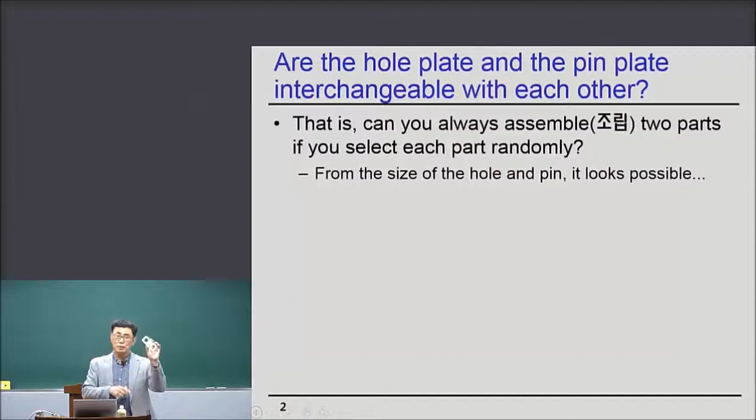Now, from the size of the hole and pin, I think you know that the hole size is from 30.0 to 31.0. 30 to 31. It's a little large compared to the basic dimension of 30. And what about the pin? The pin is smaller, right? 29.0 to 30. So the pin is smaller than 30, and the hole is larger than the basic dimension of 30. So you will think that since the pin is smaller than the hole, it can be assembled. Is it true?

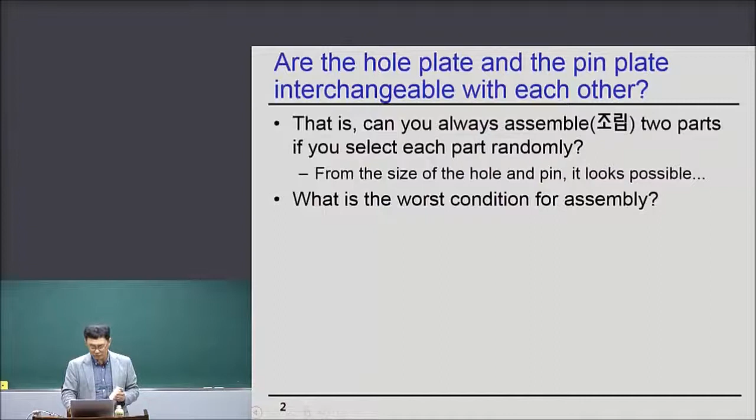Whenever you think about whether two parts can be assembled, you have to think about the worst condition for assembly. The worst condition for assembly is the maximum material condition, MMC. So if the pin should be maximum material, the pin should be large within the permitted range. What is the largest size of the pin from the permitted range? 30.0, right? Since it is 29 to 30, 30 is the maximum material condition. So if the size of the pin is 30, we call this the MMC pin plate. Now, what about the MMC hole plate?

Since this plate should be maximum material, the hole diameter should be smaller so that it has maximum material. So what is the smallest size of the hole from the permitted range? Since the hole is from 30 to 31, 30 is the MMC hole plate. So the MMC pin plate and MMC hole plate diameters are 30 and 30, right? Even if you select randomly, by chance, in a very extreme, rare case, the MMC pin plate and MMC hole plate are selected. This is the worst condition for assembly. Can they be assembled?

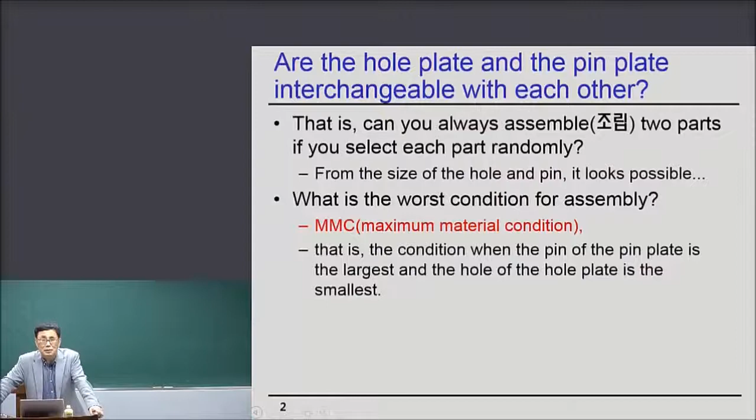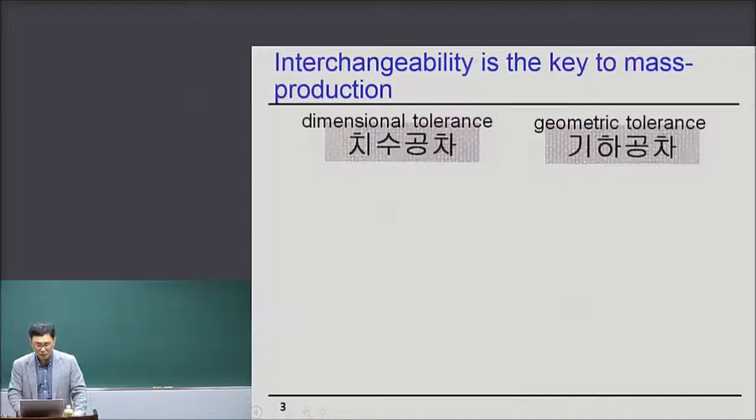And so interchangeability is the key to mass production. And tolerance, there is a dimensional tolerance and also geometric tolerance. The geometric tolerance, I will teach it next lecture. So both dimensional tolerance and geometric tolerance enable interchangeability for parts, so that mass production is possible.

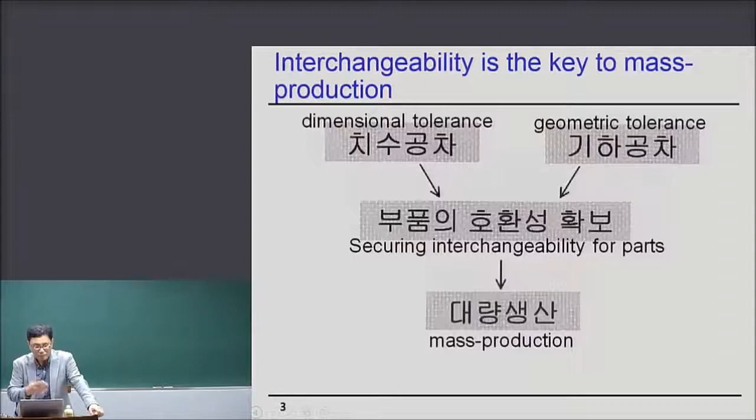So the contribution of Mr. Ford, Mr. Ford is an engineer, and his contribution to mass production is to set up the tolerance system. Okay, maybe some students think that the contribution of Ford is to generate a conveyor system. So, okay, even if there is a conveyor system installed, if the interchangeability is not secured, then mass production is impossible.

Assuming that assembly technicians try to put the tire onto the shaft, and then he found that the tire hole is smaller, so now he tried to enlarge the holes and then assemble the tire onto the shaft. Then it would take 30 minutes, even if he's a very nice, skillful technician. 30 minutes is assumed. Then how can the automobile be produced every 1 minute? Okay, so the contribution of Mr. Ford is that he set up a tolerance system so that interchangeability is possible in his shop floor. Okay, all right.

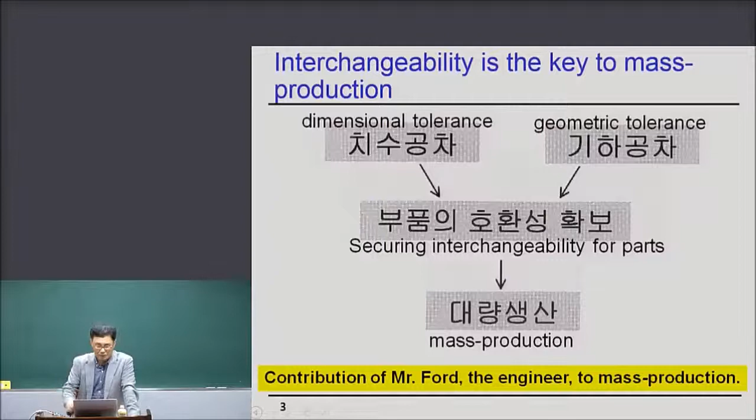So I'm going to talk about another interchangeability example, which is the assembly of a stamp and its cover. Maybe if you are foreign students, not students of Korea or Japan, maybe China, maybe in the United States, I don't think they are using any stamp instead of a signature. But anyway, in Asian countries, we are using many stamps, our own stamp. Our name is engraved in the end of the stamp, and we put it on the paper.

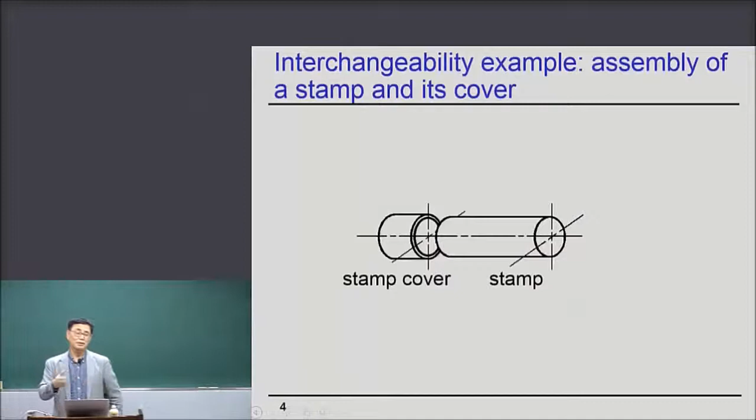And if it's an expensive stamp, it has a stamp cover like this. So the stamp cover is protecting my name at the end of the stamp. Okay. So every time I use the stamp, I put the stamp cover on the stamp. All right. Anyway, imagine that this is another example of assembly of two parts.

Now, we assume that stamp covers are manufactured by Seoul company, and its inner diameter is 10 millimeter. In my drawing, I just draw the shape of the stamp cover, and then place the dimension of 10 millimeter, just only 10 millimeter, so then the general tolerance will be applied. And the stamp by Suwon company. So the Suwon company will make many stamps based on my drawing. But on my drawing, the stamp diameter is designated only by 10, without any tight tolerance. So just 10. So general tolerance will be applied.

Now, my question is, with the stamp from Suwon company and stamp cover from Seoul company, I'm going to select one of them randomly and try to assemble it. Then my question is, will it be assembled? Okay? Will it be assembled? Now, what are you going to think about? MMC stamp and MMC stamp cover. So MMC stamp means the maximum material.

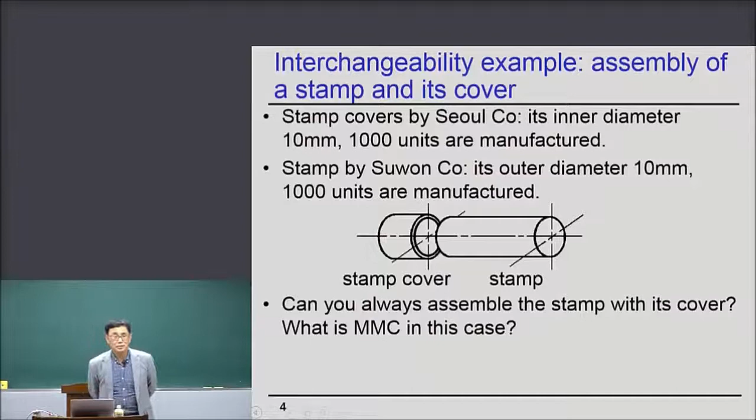So interchangeability is gone, right? Based on that general tolerance, interchangeability is impossible. And another question is: even if you can always assemble them, are the clearances proper?

Maybe the stamp is 10 plus minus 0.2, so let's assume the diameter of a stamp is 9.8, a smaller stamp, and the stamp cover is 10.2. The hole is large. So then it can be assembled, right? But the clearance is 0.4 millimeter.

If I join the stamp and stamp cover and hold the stamp in vertical direction, then the stamp cover will drop off right away because of the 0.4 millimeter clearance. The function of the stamp cover is to protect the stamp as it is always inserted. But if it easily drops off, then the function of the stamp cover cannot be realized.

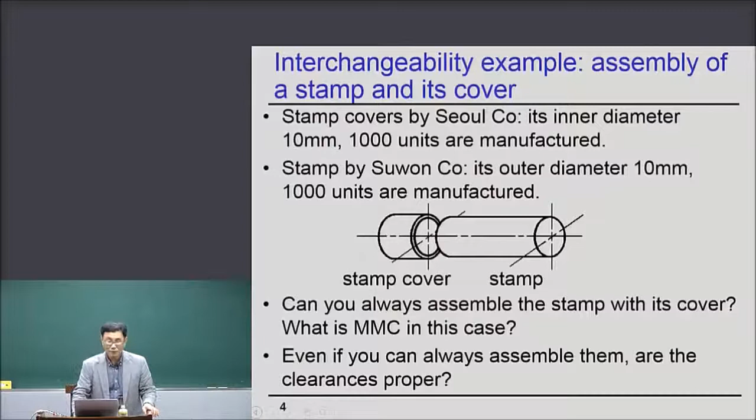So also in this case, we call it interchangeability impossible because the required function cannot be realized. All right? So anyway, with the general tolerance, interchangeability is absolutely impossible. Okay?

Now, if you send out the drawing with the general tolerance, then your stamp covers will be distributed like this. And this is my schematic. I convert this graph into this type of diagram. Where you see the large M, the stamp cover size is 10.0 millimeter. Of course, there are so many 10.0 diameter stamp covers, so I call it large M.

And large B is big size. So the stamp cover inner diameter is 10.2, and the smaller stamp cover diameter is 9.8 millimeter. Okay, it is distributed like this. The size M number is largest. Okay, so this is equivalent.

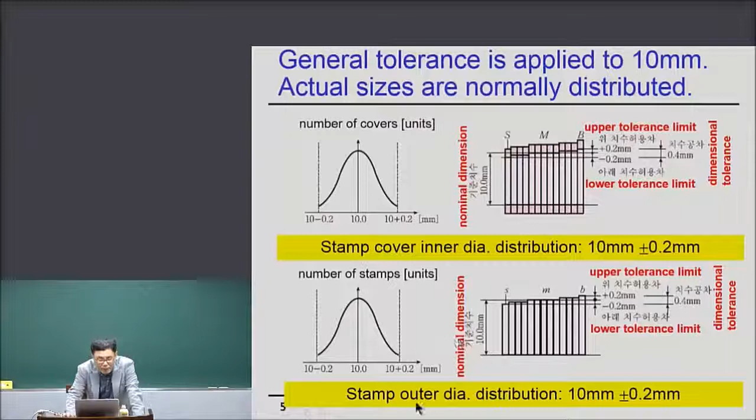And what about the stamp? Small m is a stamp size of 10.0, many small m, and B is a big size stamp, so the diameter is 10.2, and the smaller stamp size is 9.8. Okay? So these two are equivalent. Now, you try to insert both of them, the stamp with the stamp cover.

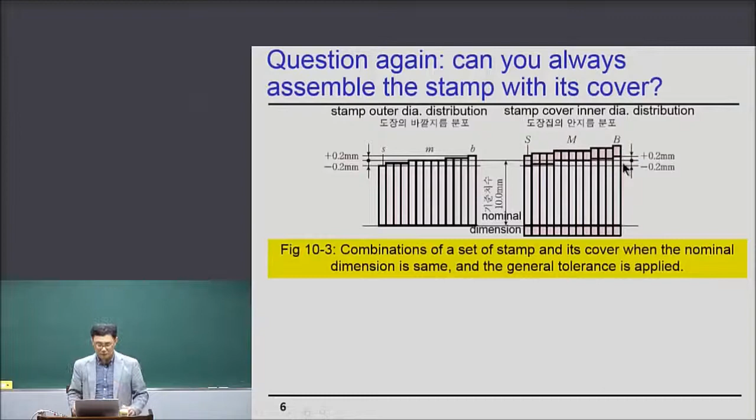So in case the large B stamp cover and the smallest 9.8 stamp are assembled with the 10.2 stamp cover, then it can be assembled with a clearance of 0.4 millimeter. Okay? But in contrary, the big stamp with a small stamp cover gives minus 0.4 clearance. If minus clearance, then assembly is impossible.

Okay? So according to this line, around half of the combinations, the assembly is impossible. Even if the assembly is possible, since the clearance is large, the proper function of the stamp cover cannot be realized. It is easily peeled off. So there are so many problems in the sense of interchangeability.

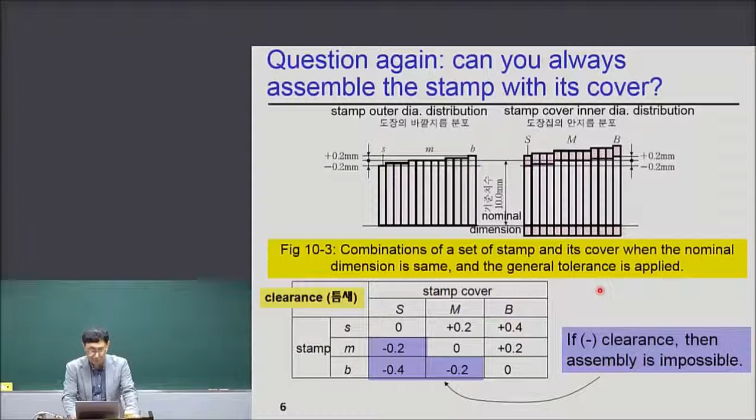I'd like to remind you again that with this hole plate and thin plate, some pieces can be assembled, but if we select the other thin plate, then the assembly is impossible. So interchangeability. So this is all the concept of interchangeability. Now I'm going to talk about the concept of dimensional tolerance.

So firstly the terminology. These are the placing examples of the dimensional tolerance. This is the dimensional tolerance for holes. In general, if you assign tolerance to holes, the hole should be large. So frequently the tolerance is larger than the basic dimension 40.

And this is a tolerance dimension example for a shaft. A shaft is, in general, less than the basic dimension 40, so minus 0.017 to, for example, minus 0.033. So the terminology is that we call it upper tolerance limit and lower tolerance limit. These are upper tolerance limits and these are lower tolerance limits.

So in this case, the lower tolerance limit is 0 and the upper tolerance limit is plus 0.016. And in this case, the upper tolerance limit is minus 0.017 and the lower tolerance limit is minus 0.033.

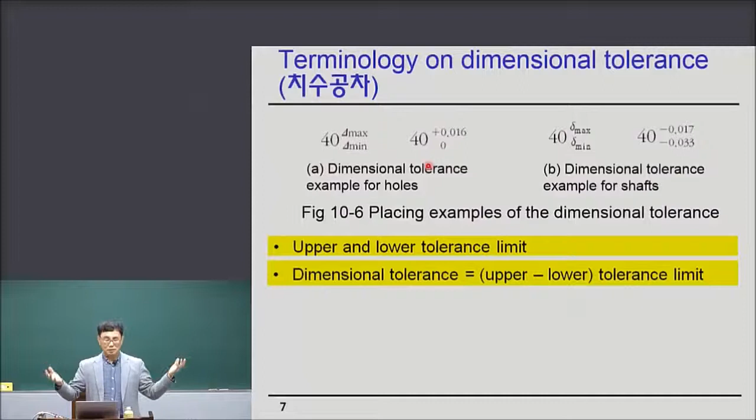All right, and also dimensional tolerance. This is the smaller meaning of dimensional tolerance. In general, these are the larger sense of dimensional tolerance. But the smaller sense of dimensional tolerance is just the difference between upper and lower tolerance limits.

So in this case, the smaller sense of dimensional tolerance is upper minus lower, which becomes 0.016. In this case, upper minus lower, the smaller sense of dimensional tolerance is also 0.016. So the dimensional tolerance is the same. In this smaller meaning, dimensional tolerance is a permitted range.

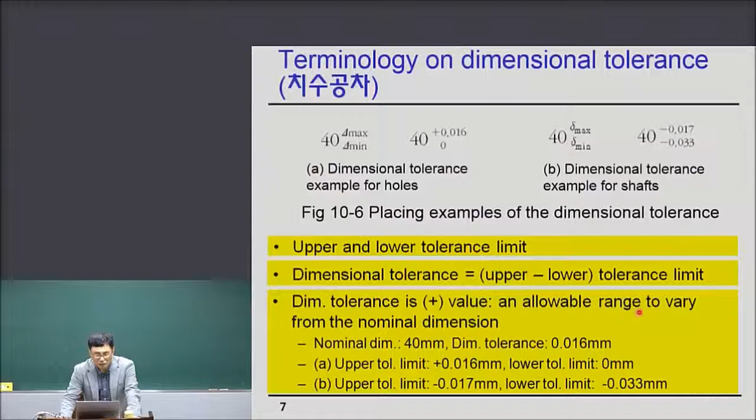Dimensional tolerance is always a plus value, right? Since it is upper minus lower, it is always a plus value, and it is the allowable range to vary from the nominal dimension. So in both cases, the allowable range is 0.016 millimeter, which we call 16 micron.

Okay, so in summary, nominal dimension is 40 here, 40 nominal dimension, and dimension tolerance, both cases 0.016 millimeter upper tolerance limit, and lower tolerance limit, which I explained just before. So this is the terminology.

So now, selecting a dimensional tolerance, step one. In this case, dimensional tolerance is in a large sense. I'm sorry for the confusion, but anyway, selecting a dimensional tolerance step one is to select the tolerance magnitude. Now, which one is more accurate here? 40 plus minus 0.008 and 40 plus minus 0.08. Maybe this is more accurate, right?

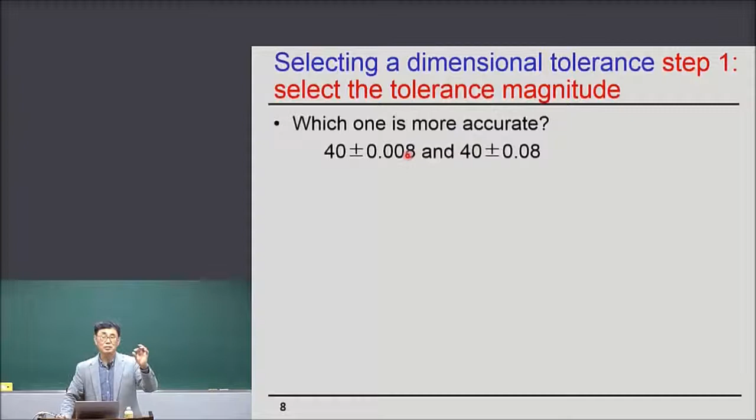Right, because the allowable range is 16 micron only, but in this case, the allowable range, which is the smaller sense of dimensional tolerance, is 160 micron. So it's 10 times larger in this case, so it is more accurate.

Now, which one is more accurate? This case and this case. This is the smaller sense of dimensional tolerance. The allowable range is 16 micron, and this is just 32 micron. But the nominal dimension here is 40, and the nominal dimension here is 300. Okay, all right, then which is more accurate? Which is more accurate? 40 to 16 micron and 300 to 32 micron.

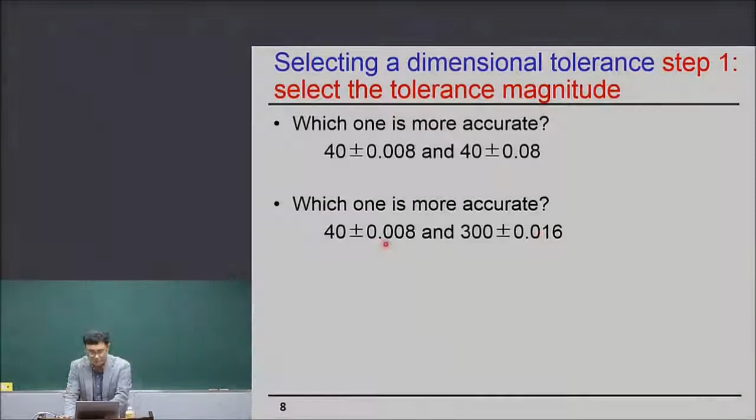Maybe it's confusing, huh? So now I'm going to show you table 10-1, magnitude of the dimensional tolerance according to the IT class. IT means international tolerance, IT class. We call it IT class, which classifies the degree of accuracy of the tolerance.

So let's see, nominal dimension, in the previous case, 40 millimeter was the nominal dimension. So 40 is larger than 30 and less than or equal to 50, so 40 is in this range. Nominal dimension 40, and at that time 16 micron. So let's go up, and it says IT 6, IT class 6, okay? So the unit is micron, so be careful about it.

Now the right case was, what about nominal dimension 300? So maybe this range, 250 to 315. So 300, and then at that time the allowable range, the smaller sense of dimensional tolerance, was 32. So let's go up. Also it is IT 6, IT class 6. So it means that both accuracies are the same, IT 6, IT class 6.

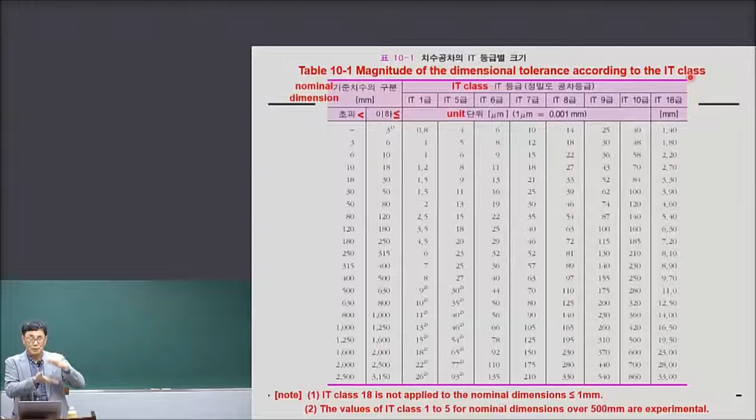It says that if the number of the IT class is larger and larger, then the accuracy range is more broad. If the number is smaller and smaller, then the accuracy allowable range is very, very smaller, so very, very accurate. Okay? All right?

So 300 plus minus, this is plus minus 0.016, so 16 micron allowable range, the smaller sense of dimensional tolerance, 32 micron, right? 32. 300 to 32 micron is IT class 6. So both are the same accuracy.

IT class is assigned according to the use of the parts. So for precise gauges and measuring devices, IT class 1 to 4 is assigned. All right? It means that if you try to assign dimensional tolerance, the first step is to decide how much accuracy you like to assign to your part based on the function of the part.

So if you're designing a pin plate like in your previous homework, then maybe you have to make it using a knife. So I cannot assign IT class 6, right? Since it is very, very accurate, you cannot make it by knife. So in this case, maybe this IT class, maybe IT class 18, 16, 18, maybe.

Now let's assume a scene at the design office of a manufacturing company, Korea Bearing. Assume that you are a freshman engineer at Korea Bearing, and there's a senior engineer. The senior engineer welcomes you to the company and wants to teach you.

The teaching is like this: the dimensional tolerance for the diameter of the bearing outer ring is IT class 7, and the tolerance limit is small h. This is a long sentence, so the senior engineer doesn't say it like this. He just says, hey, assign dimensional tolerance H7 to the bearing outer ring. Can you understand?

Oh my God, this senior engineer is trying to teach me dimensional tolerance, but he doesn't give me any number. I assumed dimensional tolerance would be plus or minus some number, but what he's teaching is H7, small H7. What does it mean? You have to understand the meaning of H7.

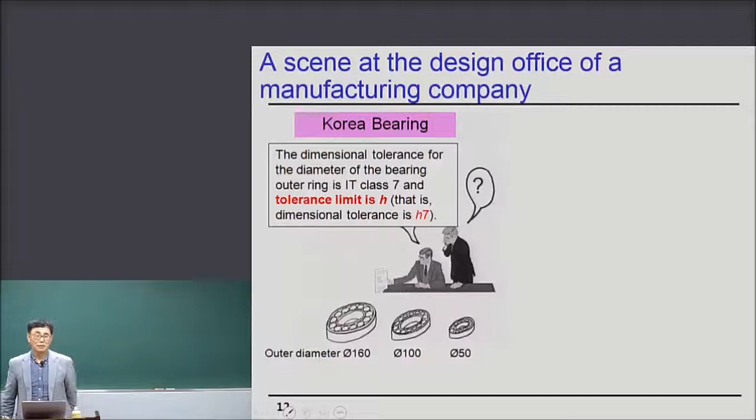He says that regardless of the nominal dimension, 160 or 100, he just says assign H7, dimensional tolerance H7, to the outer ring. You have to understand the meaning of H7.

Another case is Hyundai Motor Company. You are there, and the senior engineer is teaching you: the dimensional tolerance for the inner diameter of the transmission bearing housing — this is a housing, and this is a hole, actually a shaft, this is a hole, the housing — the inner diameter of the housing is IT class 8, and the tolerance limit is large H.

So he doesn't say this long sentence. He just says, assign dimensional tolerance large H8 to the housing inner diameter, H7, H8. If you don't know it, then it becomes trouble.

Now he explains the meaning: you are going to use the bearing produced by Korea Bearing Company. Hyundai Motors buys the bearing from Korea Bearing Company, with a diameter of 160. That bearing from Korea Bearing Company will be inserted into the housing hole, so the housing hole size is naturally 160.

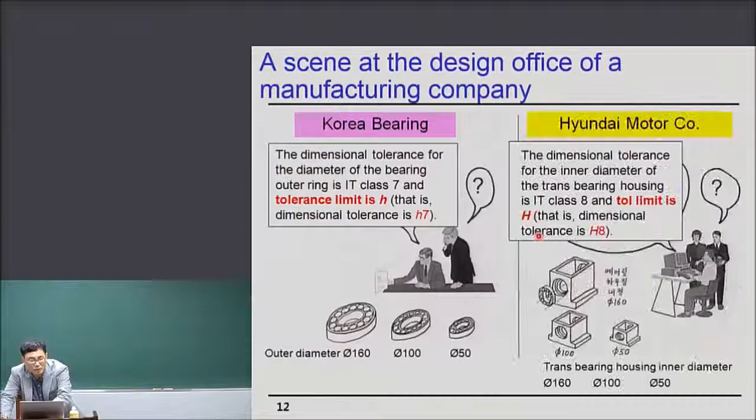The allowable range is, let me refer to table 10-1, 160, where is 160 here? Between 120 to 180, so 160 and 7, so IT 7, the cross point is 40. So what about it? Upper limit is 0 for H, and the allowable range is 40 micron. So 40 micron is 0.040, minus 0.040. So the range is 40, right, for IT 7. So you got these two numbers.

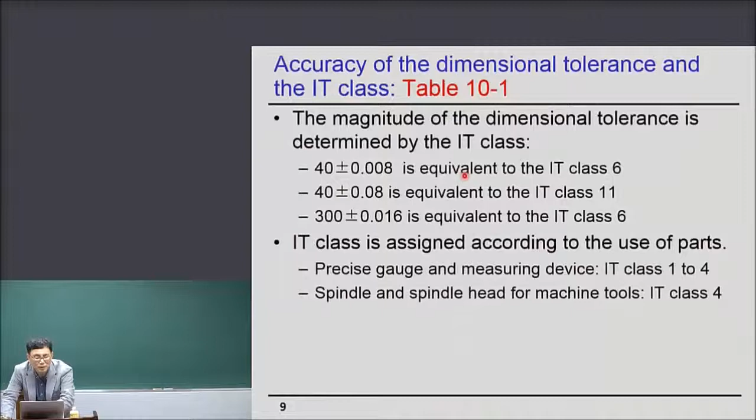So 10H7, this H is always upper limit 0. From the same table, for nominal size 10, the allowable limit, IT class 7 - so IT class 7, for 10, here is the row, and for class 7 you get the number 35, so minus 0.035. You understand me, right? The meaning of this.

Now the meaning of H8, large H8. Large H applies to the hole, because the bearing outer ring is like a shaft concept - it is inserted. And the housing is a hole, the housing is the hole thing, the hole.

So you have to refer to, if you want to find the secret of H8, you have to refer to table 10.3, the hole system. So H, large H, is here. So nominal size 160, let's say 140 to 160, less than or equal to 160 here. So at C, F, and subsequent H, you find the number 0.

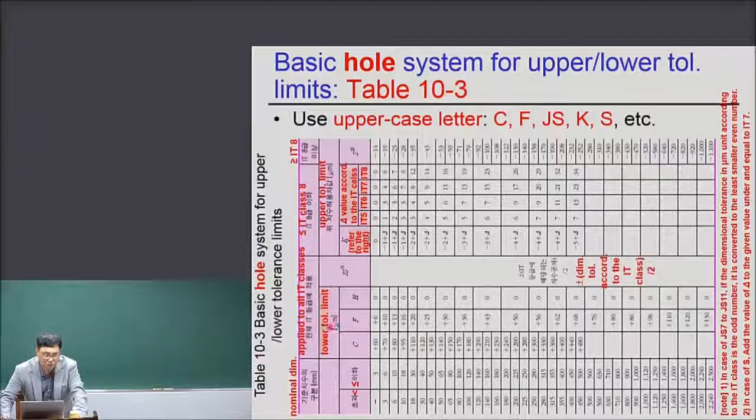Again 0, all 0. But in this case, 0 means lower tolerance limit, low limit. So low limit, 0, 0, 0, for H. Now since the lower limit is 0, then what about the upper limit?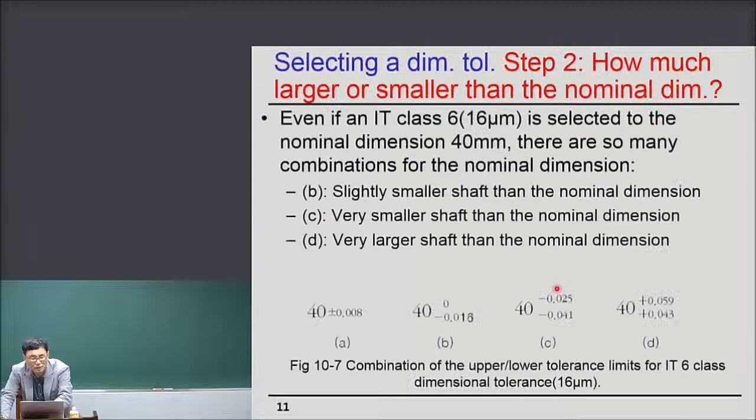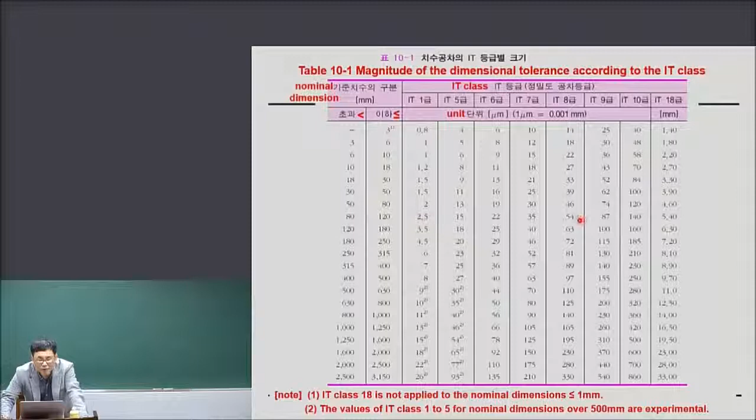IT class 8. So nominal size 160, IT class 8. Let's say 160 and IT class 8 here - 8 here, 160, and the value is 63. So 0 and plus 0.063.

So remind one is that for the h shaft, h7 bearing, why in Hyundai Motors is H8 tolerance applied? Why h7 and H8? The diameter of the bearing outer ring, the dimensional tolerance, is h7. Then why do Hyundai Motors try to apply H8 tolerance to the bearing housing where that bearing from Korea Bearing Company is inserted? Why?

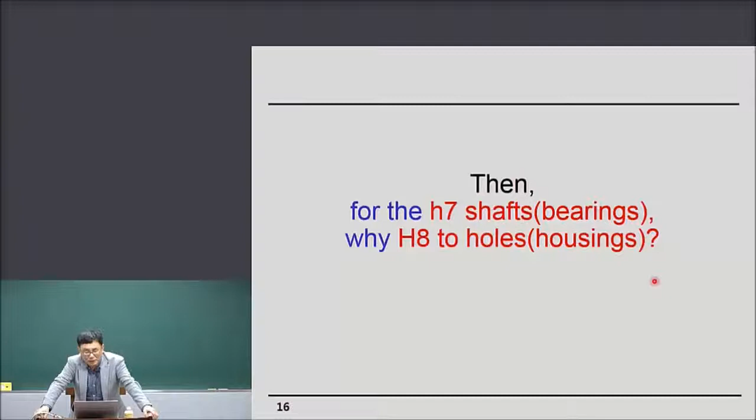What's the relationship between small h7 and large H8? If you know the secret of this, then you can solve the whole concept of applying the dimensional tolerance. All right. Now, for any nominal dimension, 160, 150, it doesn't matter, assign h7 to all bearings, H8 to all housing holes, then you get this relationship. Small h is a shaft, and large H is the hole. Shaft and hole are assembled. Then the hole should be large.

So for small h, since the upper limit is 0, the distribution of the bearing is always like this. The housing in Hyundai Motors is always like this, larger than 0. Why? For large H, the lower limit is always 0. So for any nominal dimension, 160, 150, the relative relation between bearing and housing hole is like this. So it can always be assembled, since the hole is larger than the shaft. The bearing outer ring is always smaller than the bearing housing of Hyundai Motors. Interchangeability. The first condition for interchangeability.

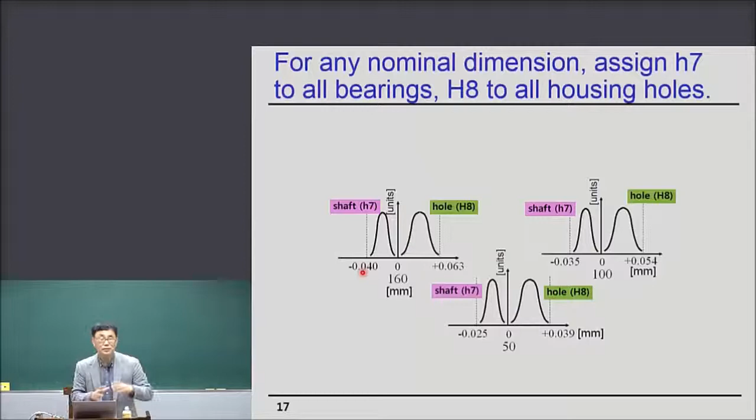So let's imagine an extreme case: the bearing housing is a little large within the permitted range, 160 plus 0.063, so 63 micron large. And the bearing, in the extreme case, is 40 micron smaller than 160. So the maximum clearance is 40 micron plus 63 micron, around 100 micron. 100 micron is 0.1 millimeter.

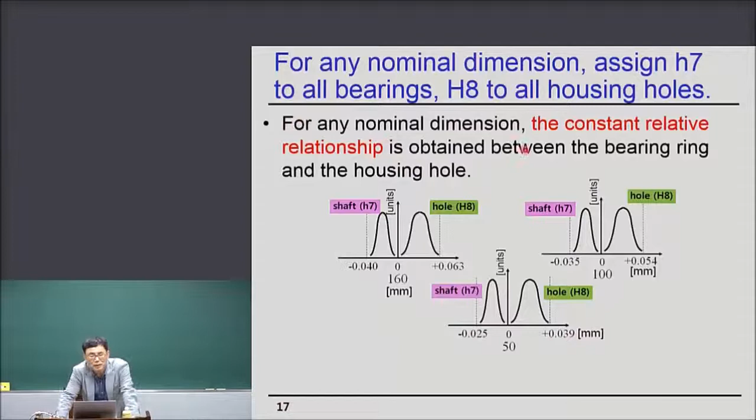Very small clearance, actually. So even if around 0.1 millimeter clearance exists, the function of the bearing still can be realized. So this is a very tight, very accurate tolerance, right? If the nominal dimension is smaller, then the maximum clearance also becomes smaller. 50, then 25. So for any nominal dimension, a constant relative relationship is obtained between the bearing ring and the housing hole.

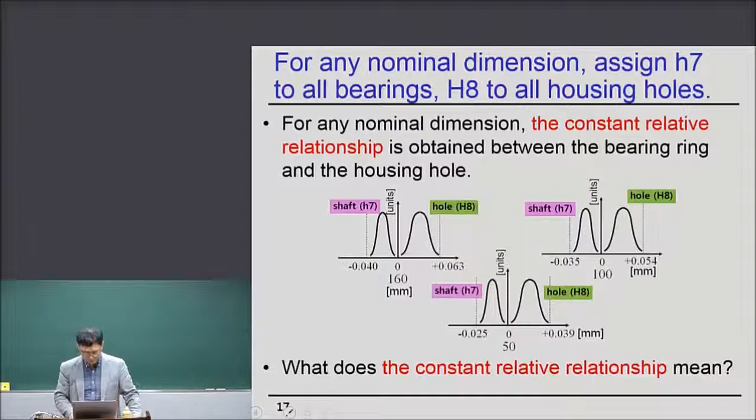So what does this constant relative relationship mean? We call it a fitting system. There are largely five fitting systems, and among the 5, three are usually used. The first is loose running clearance fit, which I call just loose fit. Close running clearance fit, I will call close fit. And precise locational clearance fit, I will call precise fit.

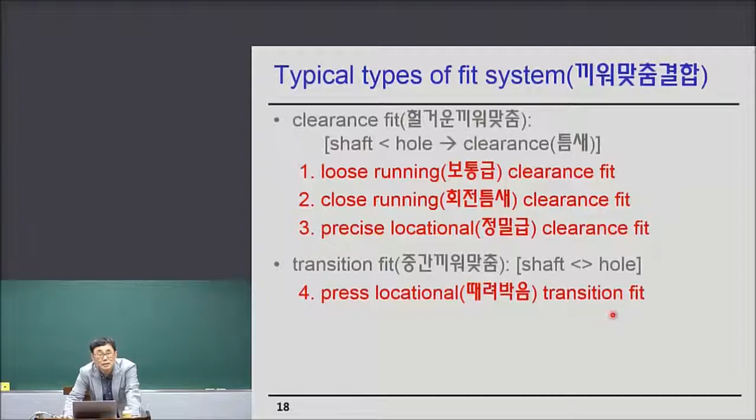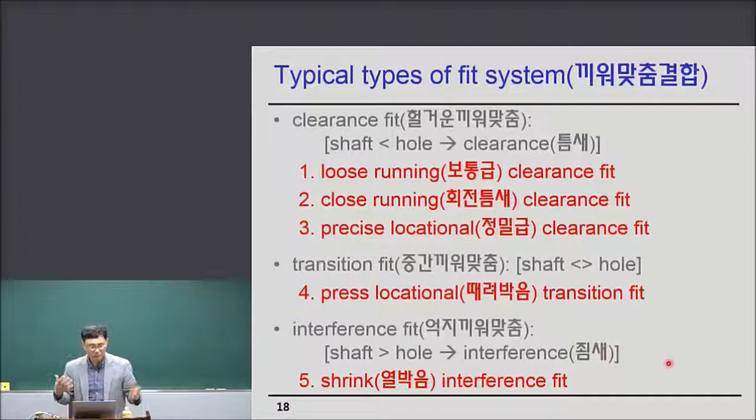And also, not in frequent cases, there is the press locational transition fit, which I will call press fit. And finally, the shrink interference fit, which I will call shrink fit. All right, 5 fits. What do these 5 fitting systems mean?

Loose fit, loose running clearance fit, means something like the relative relationship between a desk drawer and desk frame. Maybe it's not a proper example, but I'd like to give you some feeling for the loose fit. A window and its sliding guide. Human foot and shoes, maybe. A bowling ball's holes and your fingers.

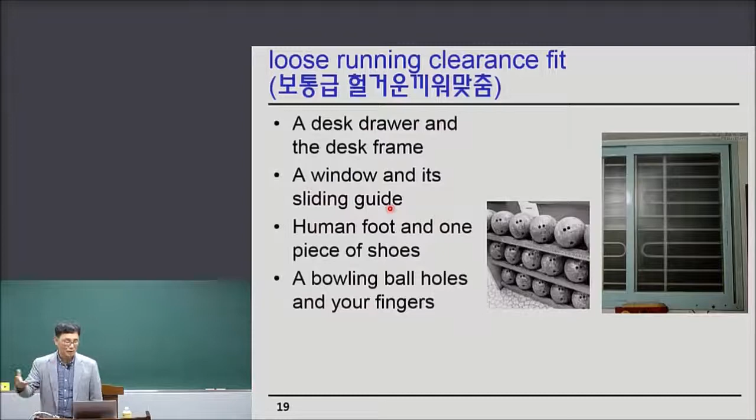So anyway, the definition of loose fit is that it can be assembled or disassembled freely without any external force. It can be assembled and disassembled without any external force. Then we call it loose fit. Close fit, close running clearance fit.

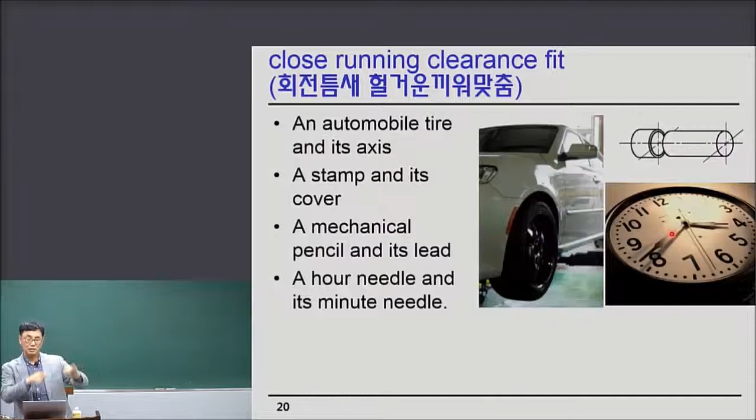Examples of close fit are an automobile tire and its axis, a stamp and its cover, a mechanical pencil and its lead. You're using a mechanical pencil and the lead is sliding inside the mechanical pencil hole. And the hour needle and its minute needle: two needles have relative motion, but they are fixed on the same center. So by using a slight force, it can be assembled or disassembled.

Two parts are sliding with each other using the other part as its guide. So relative motion, guide, two parts are sliding with each other. Relative motion is possible, but sometimes we call it a little tight fit. So we call it close fit. And precise fit, precise locational clearance fit.

Lego blocks, maybe you have many experiences assembling and disassembling Lego blocks, right? Lego blocks, once assembled, cannot be disassembled easily. If it is disassembled easily, then it is not a Lego block. It is not the proper function of a Lego block.

A spline shaft and its gear. This is a spline shaft and its gear. So spline and gear: relative motion is possible, but it is very precise. Tight accuracy is required, even if there's relative motion. Anyway, bearing outer ring and its bearing housing, like the previous example.

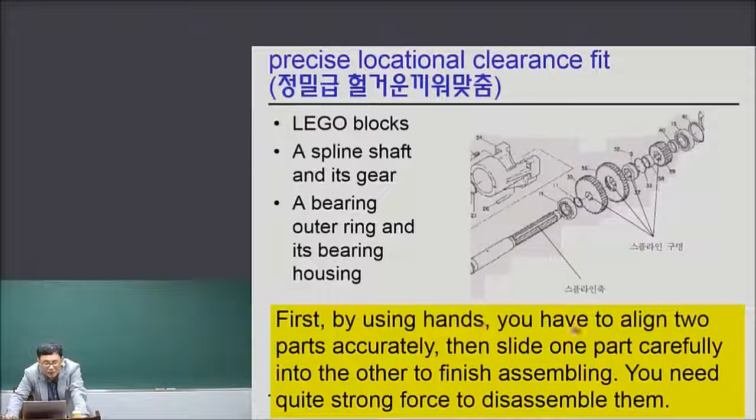So first, by using hands, you have to align two parts accurately. Even if it is a very precise assembly, it should be done by hand. If you're using a hammer, it is not precise assembly. Even a precise device, something like a hard disk, has to be disassembled and assembled by hand. Even if it has a very tight fit, tight clearance, assembly and disassembly by hand should still be possible.

Then slide one part carefully into the other to finish assembly. You need quite a strong force to disassemble them. Okay, so I will show you some examples using the blackboard mode. Now this is a part of the gear pump. And this is a part which is assembled into the core of the gear pump.

So now, to assemble this part, the alignment must be very precise. So it cannot be inserted easily, but once you align it rightly, it's easy. Yeah, it's very difficult. Once it is aligned precisely, then it can be assembled. Now, assembled, right? But the alignment is very important.

So that is precise fit. So I explained the three fits: loose fit, and close fit, and precise fit.

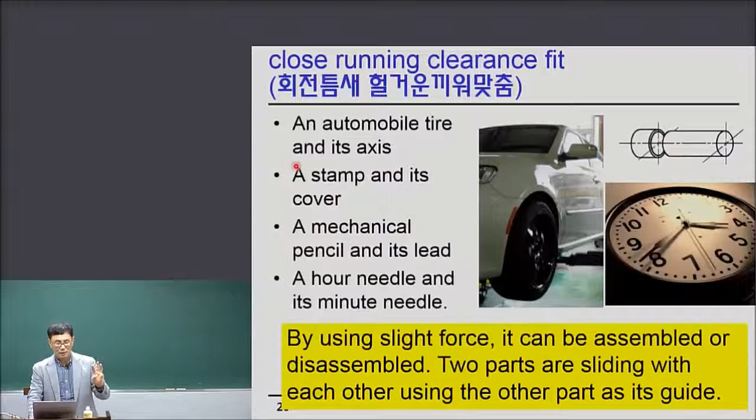Okay, and the last one is not frequently used, but there is a press locational transition fit. So I call it press fit. Press fit is something like a wine bottle and its cork cap, okay? And a pinhole and its pin. I explained the function of pins in the last lecture.

So to insert this pin into the hole, you use a hammer, right? So you have to use a hammer or a press to assemble or disassemble two parts. It requires very, very huge forces to assemble or disassemble. So we call it press fit.

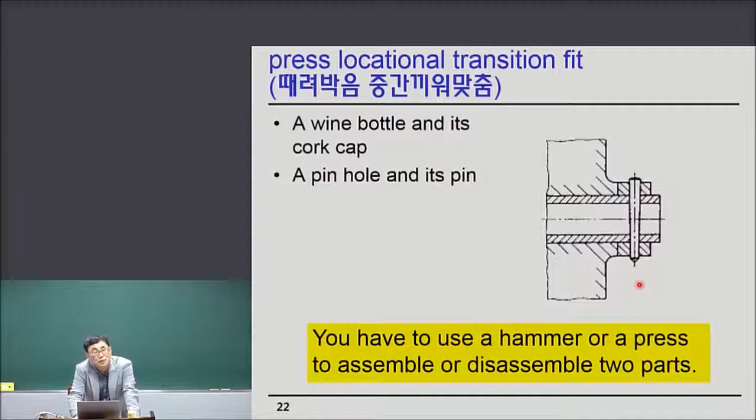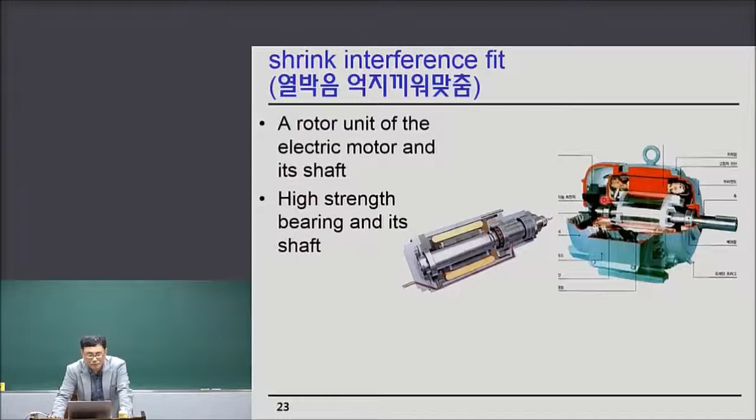And the last one is the shrink fit, shrink interference fit. So a rotor unit of the electric motor and its shaft. Electric motor, the shaft and the rotor where the coil is wound, and a high strength bearing and its shaft. So this is where you heat a part. In this case, a rotor unit onto the shaft.

Sometimes the shaft is put into dry ice, very, very cold boxes, and then the shaft shrinks. Then very quickly you have to put the shaft and rotor unit into the required position. Then let the temperature go to the ambient temperature. Wait until it reaches the ambient temperature, then the shaft becomes large, so that the fit becomes a shrink fit. So the two parts cannot be disassembled anymore once they reach the same temperature.

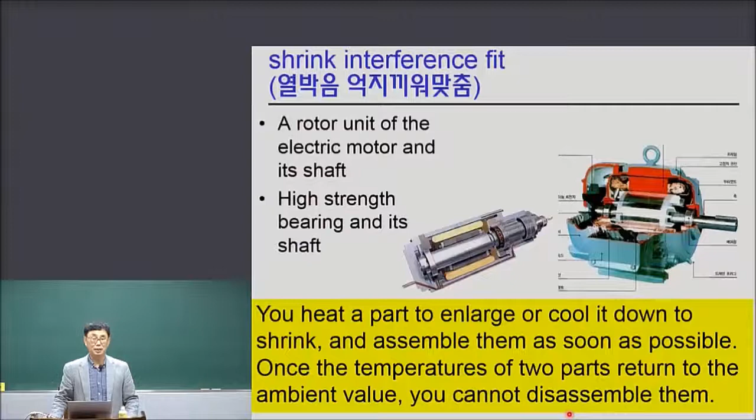Or you make the rotor unit a high temperature. So the rotor unit is enlarged, and then get that rotor unit onto the shaft and let them reach the same temperature. The rotor unit at high temperature was large, but it shrinks again, and then the two parts cannot be disassembled. So you heat a part to enlarge it or cool it down to shrink it and assemble them as soon as possible. Once the temperatures of the two parts return to the ambient value, you cannot disassemble them. So we call it shrink fit.

So anyway, this table is the summarization of my five-fit system. Please refer to it. The interesting thing is, to determine H7, H8, the second step, what was step one? What was step one to designate the proper dimensional tolerance? Step one is to decide the level of accuracy, according to the IT class: class 6, 7, 8, 10, right? Step two is to decide which fit system you need, considering the function of my product.

Once you decide the desired fit system, the dimensional tolerance combination to obtain that fit system is selected from the basic hole system as follows. This is a basic hole system. So you assign dimensional tolerance to the hole first, among H6, 7, 8, 9, 10. Once you assign the tolerance to the hole, for example H8, then if you need a close fit, you may assign f7 or f8 to your shaft.

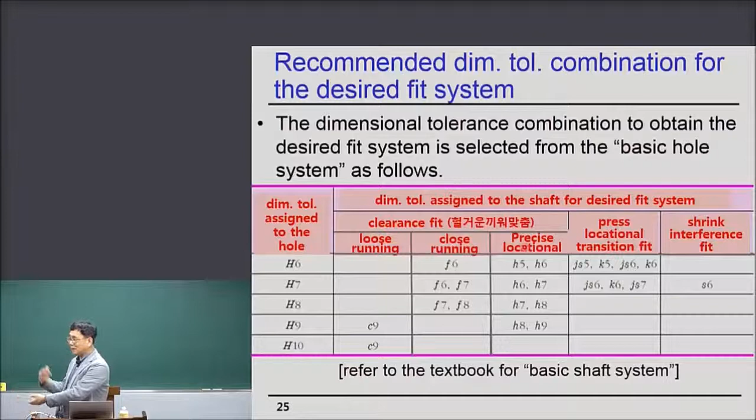This is the story. At Hyundai Motor Company, from the brochure of Korea Bearing Company, you found that the bearing outer ring tolerance was h7. Then I'd like to design the bearing housing for that bearing. If I need a precise fit, then H7 here and h7 too. So H7 and h7 is also a precise fit. H8 and h7 is also a precise fit. So anyway, H8 to h7 and H7 to h7 are all precise fits. Okay, all right.

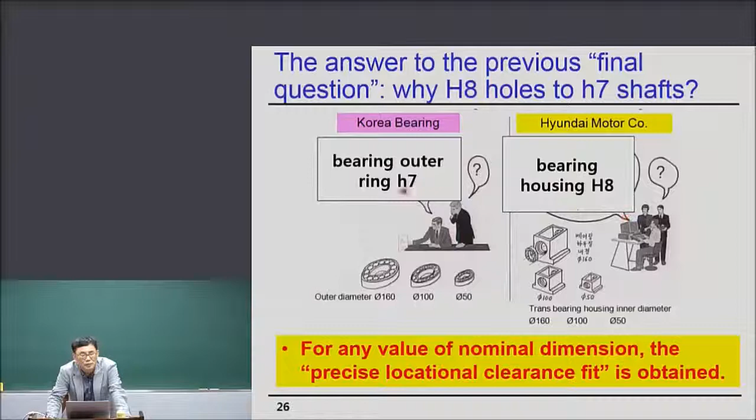Close fit is H6 to f6, or H7 to f6, or H7 to f7; these combinations realize close fit. Close fit is what? This is precise fitting, but relative sliding motion is still possible. So the final answer to the previous question, why an H8 hole to an h7 shaft, is to realize precise fit. It's a simple story. For any value of nominal dimension, the precise fit is obtained from the combination of H8 and h7. So now, don't worry about the size of the product.

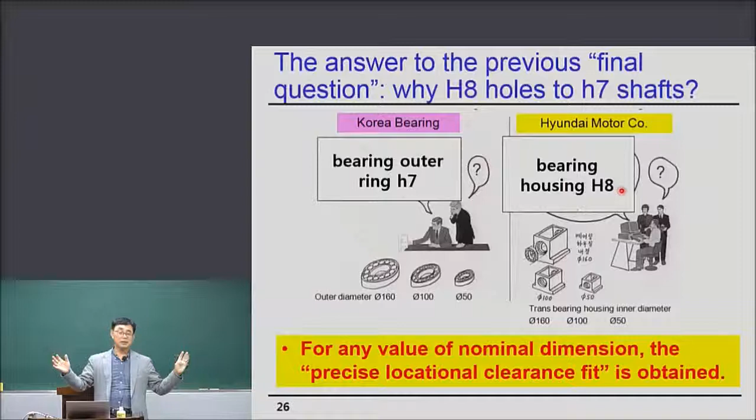If the bearing is large, 200, but you want a precise fit, then even if it is 200 or 250, just apply h7 and H8. That's it. So how simple and how reasonable a system it is. So h shaft and H holes result in a precise locational clearance fit.

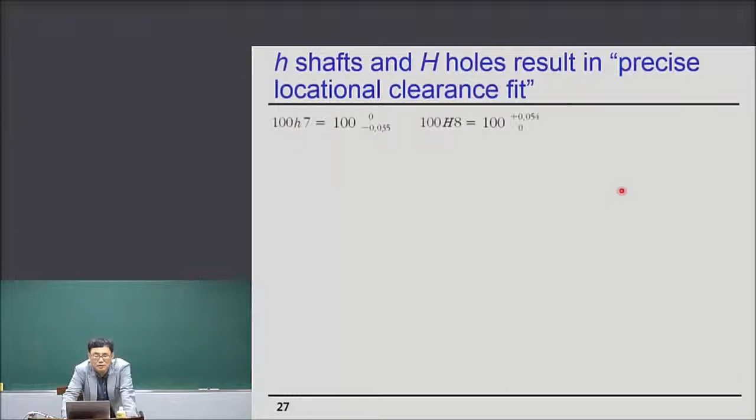So looking at it closely, the h shaft's upper tolerance limit is 0. So the shaft diameter is always smaller than or equal to the nominal dimension. The H hole's lower tolerance limit is 0. So the hole diameter is always larger than or equal to the nominal dimension. So you can get a minimum allowance of 0, an average allowance of 44 micron, and a maximum allowance of 89 micron. 100 is the nominal dimension.

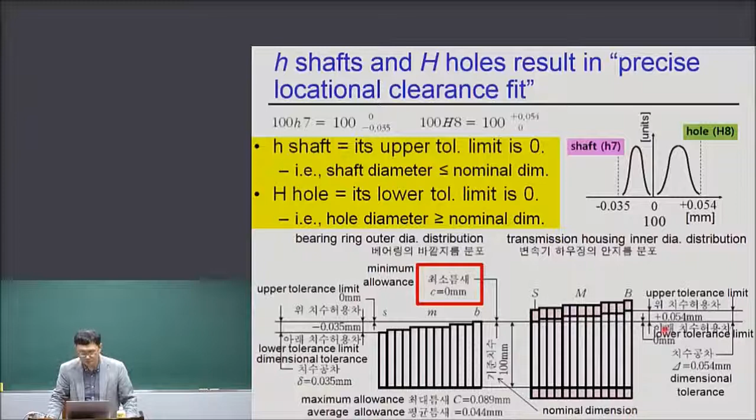All right, return to the case of the stamp and stamp cover. How do we select the dimensional tolerance? First, what fit system will be okay? Considering the function of the stamp cover, we select close fit. Precise fit will give pain to any customer. If you use the stamp and try to assemble the stamp cover but still need very precise aligning, it will consume much time. Then who will use your stamp cover?

So the assembly should be easier than precise fit. But if it is a loose fit, it is assembled easily, but if you reverse it, the stamp cover easily drops off. Then who will use your stamp cover? So in between loose fit and precise fit, there should be some fit system, which is close fit.

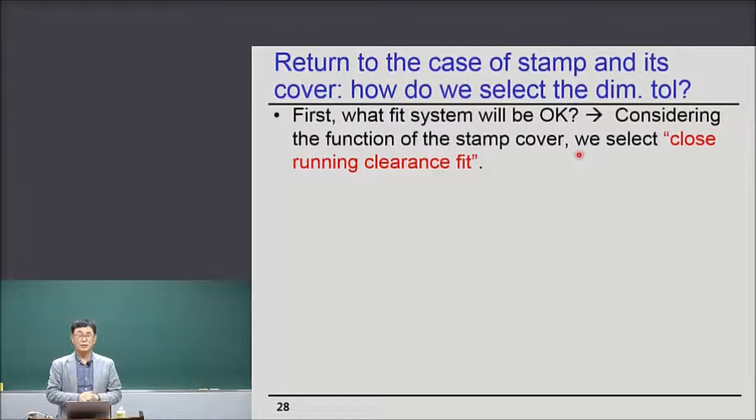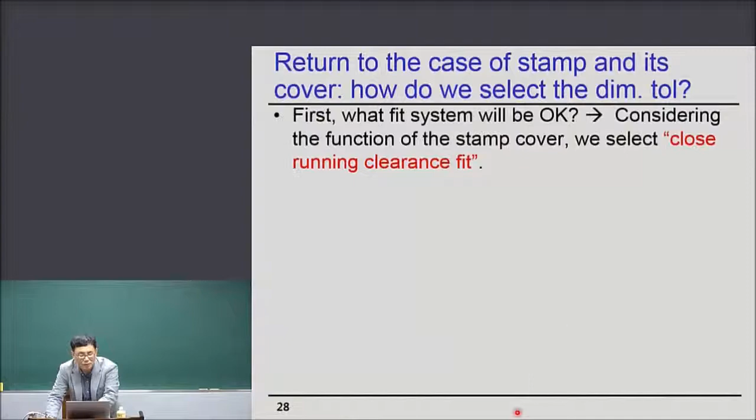All right. So, dimensional tolerance combinations to obtain a close fit. Actually 5 options are possible: H6 and f6, H7 and f6, H7 and f7, H8 and f7, H8 and f8. 5 combinations are possible according to the table. This table, right? Basic hole system, the close fit. Okay, 5 combinations here.

Then among 5 combinations, since the required accuracy for the stamp is not high, a stamp is a stamp, maybe IT class 8 rather than IT class 6 is recommended, since IT class 8 is relatively cheaper than IT class 6. IT class 6 is more precise accuracy. So we decide that among 5 combinations, the loosest accuracy is H8 and f8.

So you may select stamp cover 10 H8. The stamp cover is a hole, and the stamp is a shaft. So large H and small f. So large H8 and small f8. Can you understand f8? What's the meaning? Please refer to table 10.2. Can you follow me? Let me go to f8.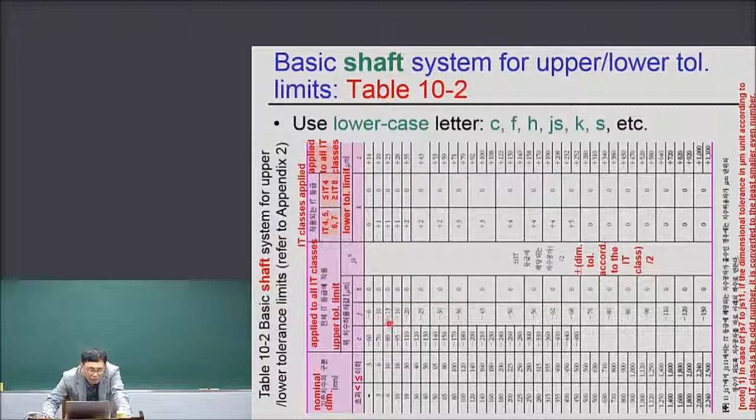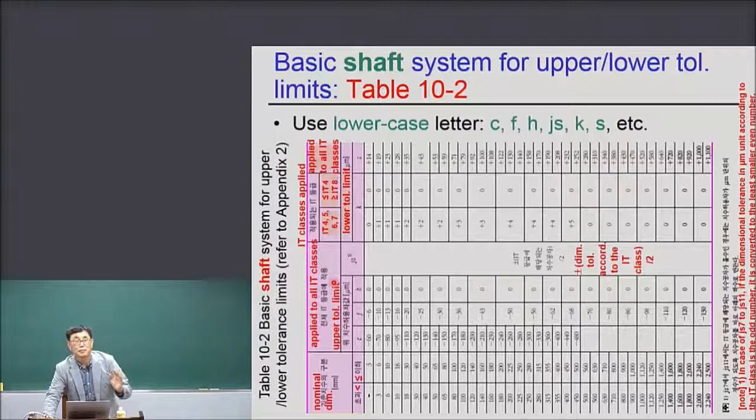What's the secret of f? Let's go to the table, 10.2. Sorry, but it's important. Shaft, f. Where is f? Here. Nominal size is 10. Where is it? 6 to 10 here. And 8. So 6 to 10, f: minus 13 micron. Minus 13 micron is what? It's the upper tolerance limit.

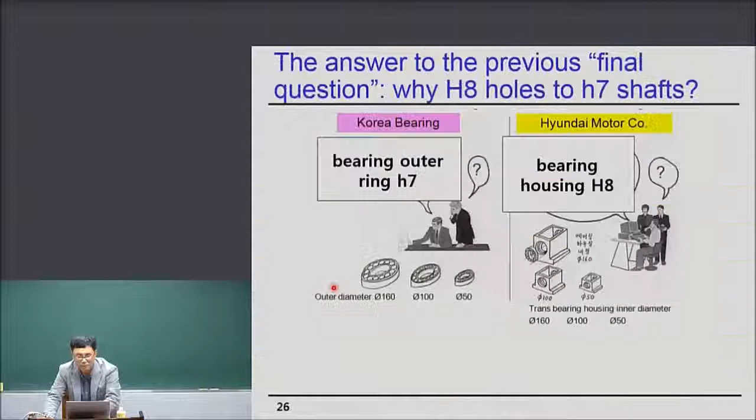But anyway, f is here, 13 micron, so minus 0.013 millimeter. So 10, IT class 8: what is the permitted range? If you look at table 10.1, it would say 22 micron. So the lower limit is minus 0.035 millimeter. IT8, the range is 22 micron. So this is the secret of the dimensional tolerance.

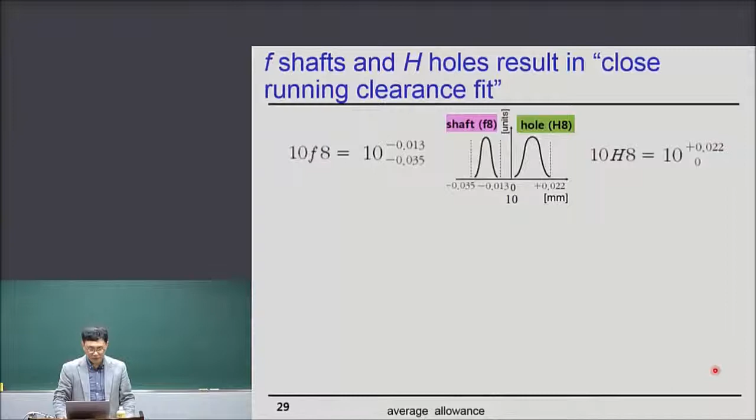So f shaft and H holes result in close fit. Why? Because a minimum of 13 micron is still secured as minimum allowance. In the precise fit, the minimum was 0, but now in this case it's 13, and still the shaft is smaller than the hole, so it can be assembled. So average allowance is 35, and maximum allowance is 57 micron. 22 plus 35 becomes 57.

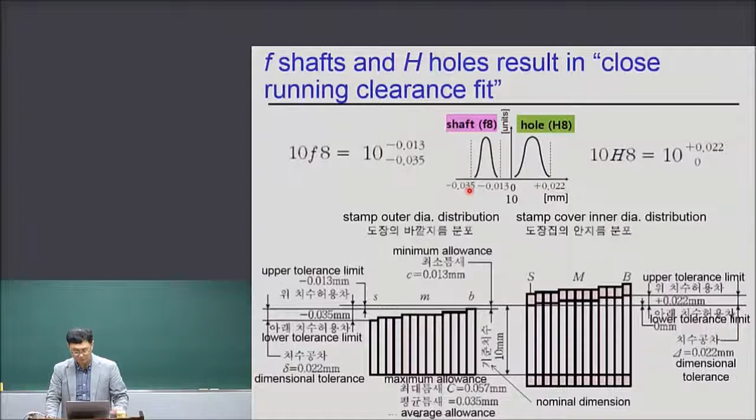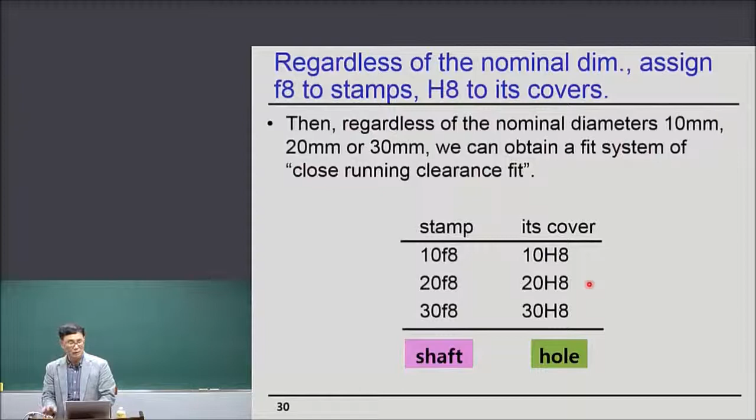So regardless of the nominal dimension, assign f7 or f8 to the stamp and H8 to its cover. Then regardless of the nominal diameter, 10, 20 or 30 millimeter, we can obtain a close fit system for the stamp and stamp cover. Big stamp, small stamp, doesn't matter. Just apply f8 and H8, then you can realize close fit, which is the required function for the stamp and stamp cover.

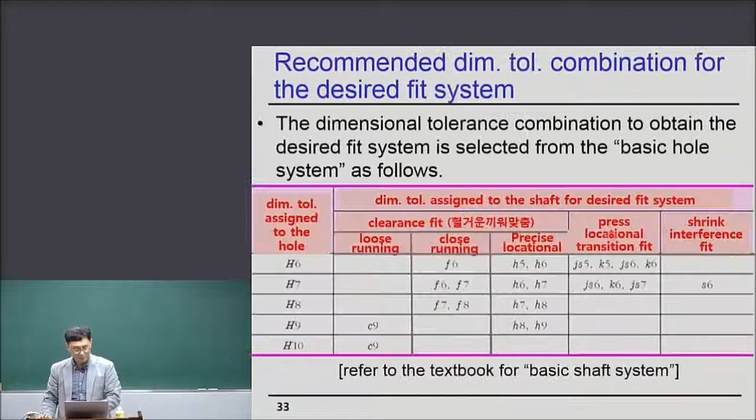Now, the selection of dimension tolerance. The bush outer diameter and pulley hole is a press fit since the hammer is used. So bush outer k6 and H7. k6, H7. What example? Press fit, k6, H7. Okay, H7, k6, and press fit. All right. And the bush is fixed inside the pulley hole, no relative motion possible.

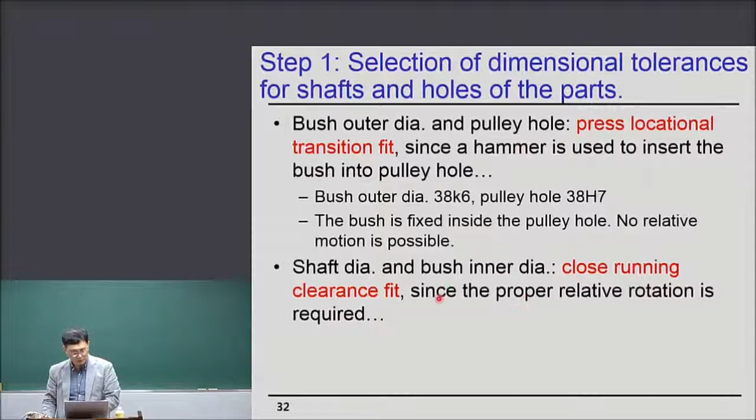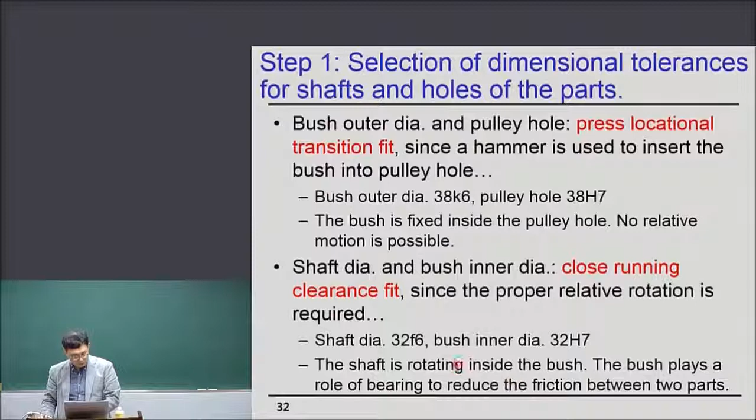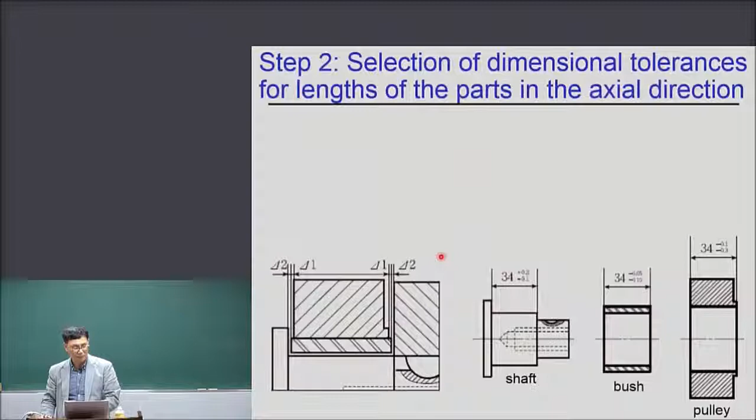The shaft diameter and bush inner diameter is a clearance fit since proper relative rotation is required. So shaft f6 and H7. The shaft is rotating inside the bush. The bush plays the role of a bearing to reduce the friction between two parts. So it is a clearance fit. So f6 and H7. H7 and f6, clearance. Understand? Okay.

Now the dimensional tolerance for length. All we talked about so far was dimensional tolerance in the radial direction. But in the axial direction you also have to apply dimensional tolerance, so that after assembly the clearances delta 1 and delta 2 are secured, so that the bush contacts the body rather than the pulley. If the pulley contacts the main body, then the friction will be very high. So the bush must contact the body first. So delta 1, delta 2 clearance has to be secured.

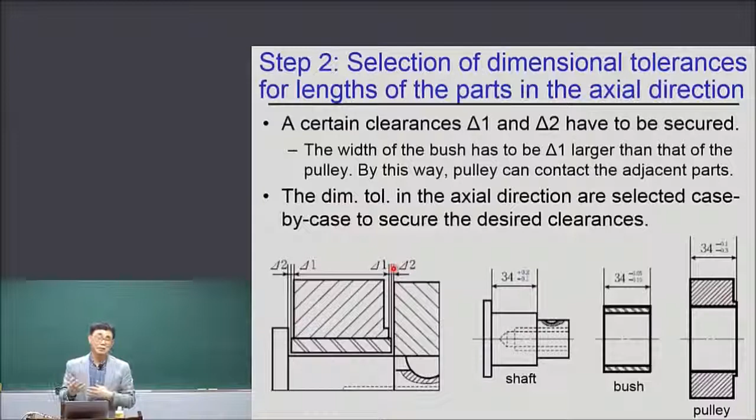Now, this is homework 15. Write the solution of the following two problems on one A4 homework paper. Problem 1: the nominal dimension of the tire hub hole is 80 millimeters. What is the proper fit system you are going to achieve? And select each dimensional tolerance for the shaft diameter and tire hub hole. What are the minimum, maximum, and average allowances?

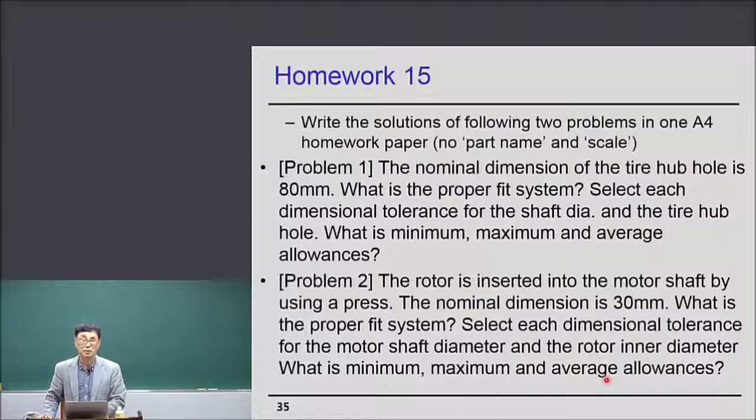And problem 2: the rotor is inserted into the motor shaft by using a press fit. The nominal dimension is 30 millimeters. What is the proper fit system? Oh, I just gave the right answer. Select each dimensional tolerance for the motor shaft diameter and the rotor inner diameter. What are the minimum, maximum, and average allowances? This is the example.

You need geometric tolerance. Okay? So in the next lecture I will talk about geometric tolerance. With dimensional tolerance and geometric tolerance all together, you can secure interchangeability. So the next lecture is also very important. Okay?